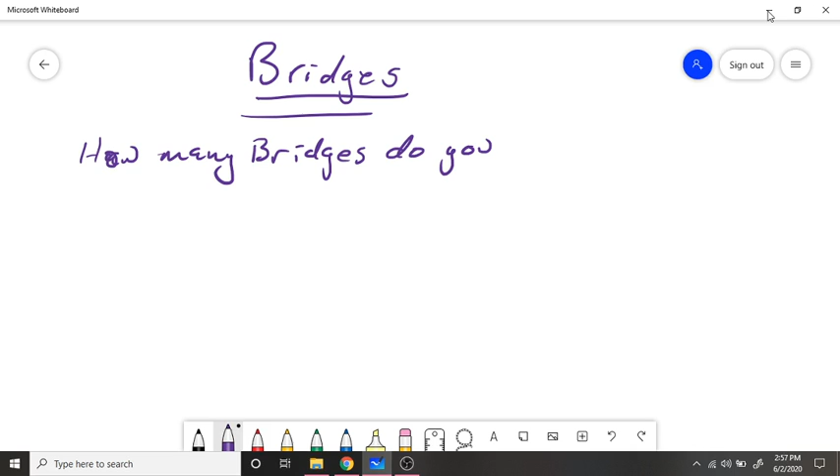How many different types of bridges do you know about? You might be able to tell me about some famous bridges, like the Golden Gate Bridge, which is a suspension bridge. Or you might tell me about how the main bridge downtown has spans, or that when you were canoeing, you saw a bridge that was like a stone arch. Most of the time, you don't ever think about bridges. They blend right into the scenery.

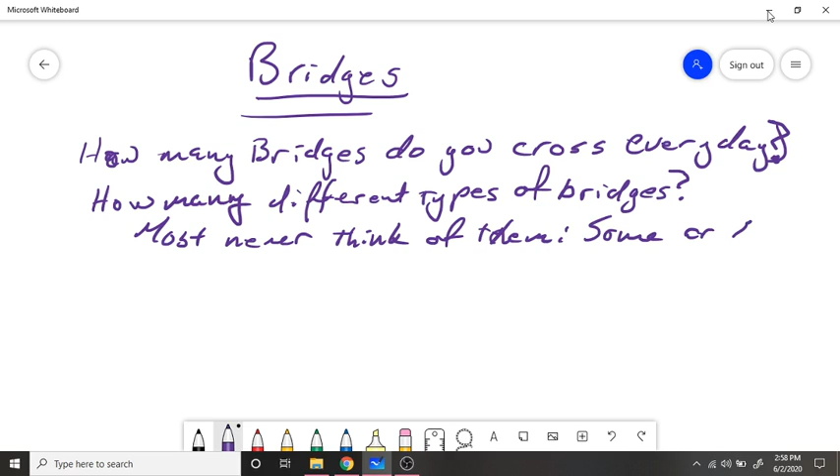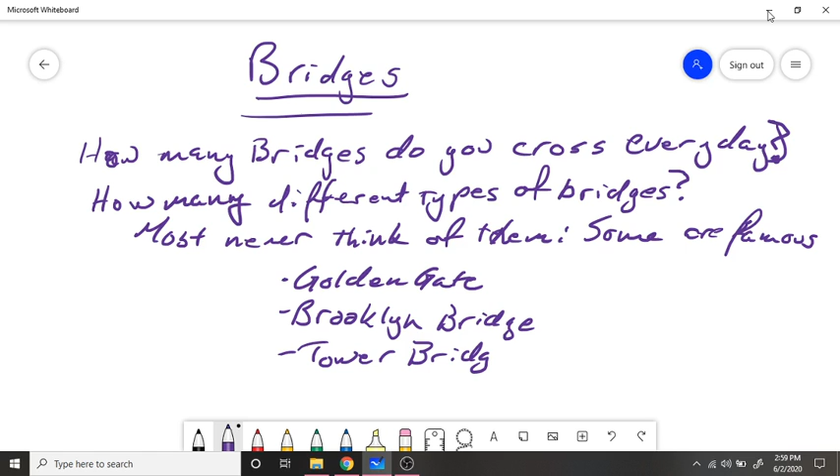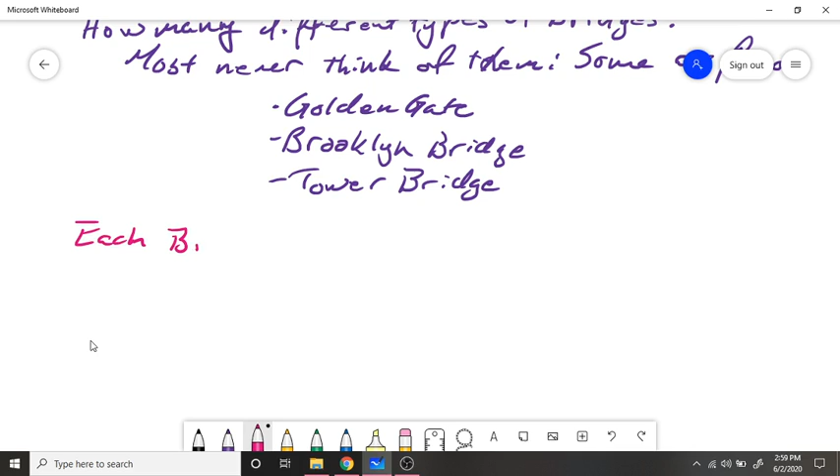But sometimes, some are very famous, like the Golden Gate Bridge in San Francisco, or the Brooklyn Bridge in New York City, or the Tower Bridge in London. But each bridge, no matter where it is located, is unique. And each bridge is going to have its own set of design challenges.

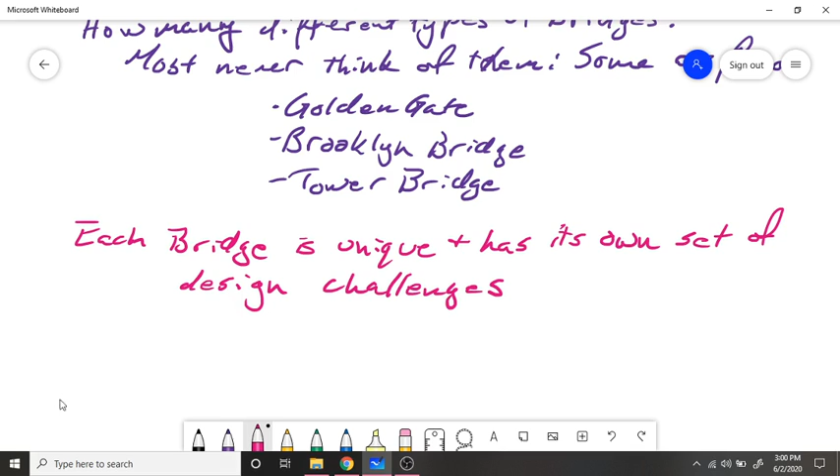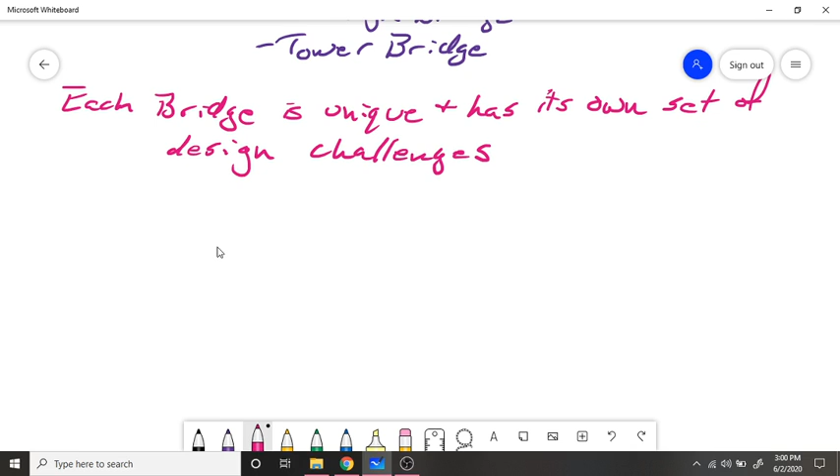For example, across the Merrimack River between Georgetown and Methuen, there are 4 bridges. There's the Rocks Village Bridge, there's the Groveland Bridge, there's the Basiliere Bridge, and then there's the County Bridge. Each one of those bridges is different because each one is built in a different location. They are spanning the river at slightly different widths, and they are in different parts of a settled community. So each bridge is unique.

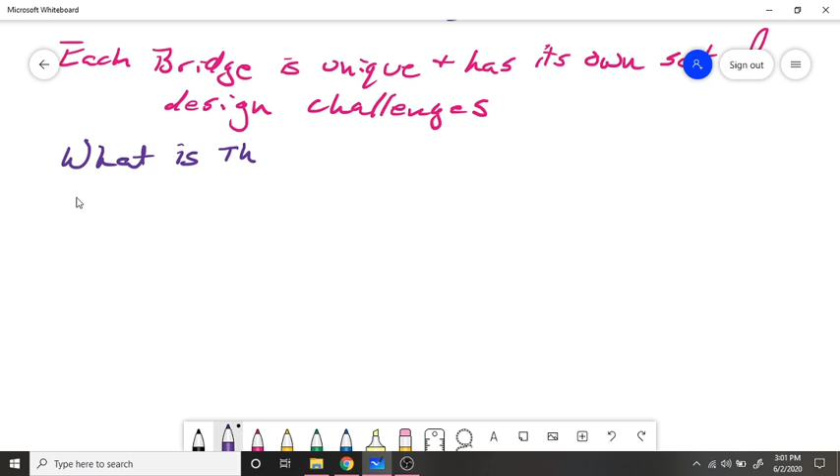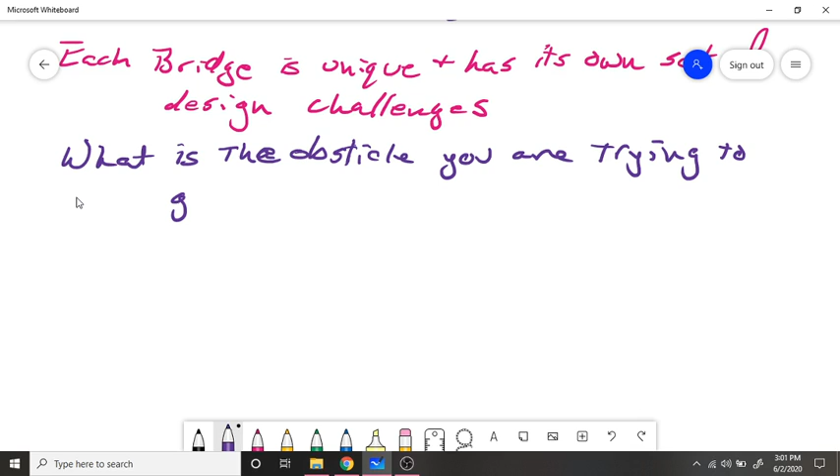When designing a bridge, you have to think about what is the obstacle that you are trying to get past. How much is this bridge going to be used? Is it just going to be foot traffic? Is it going to be cars? Is it going to be people walking and cars? So how much use is the bridge going to get? What is the kind of traffic that's going to be going over that bridge?

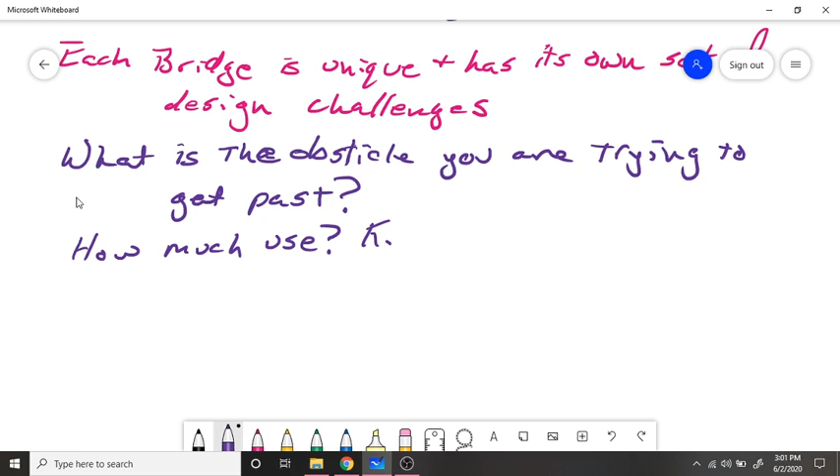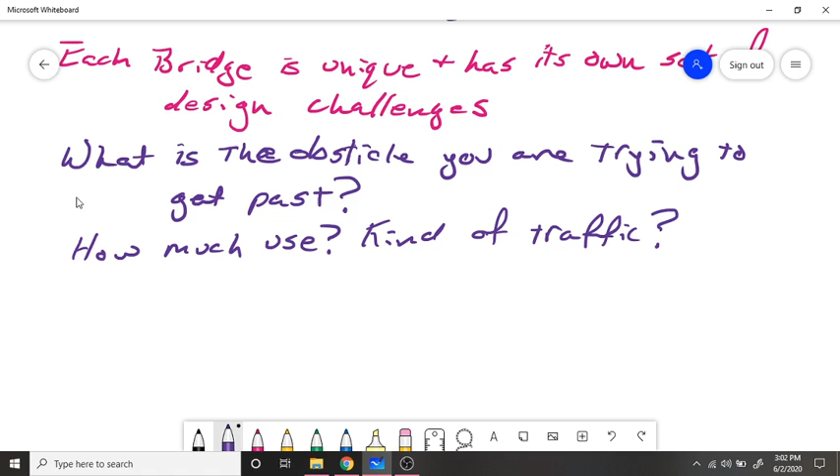Is it just going to be horses and buggies? Or is it going to be automobiles? Is it going to be 10,000 automobiles? Is it going to be automobiles and big trucks? I don't know. These are all things that engineers have to think about when they are building bridges.

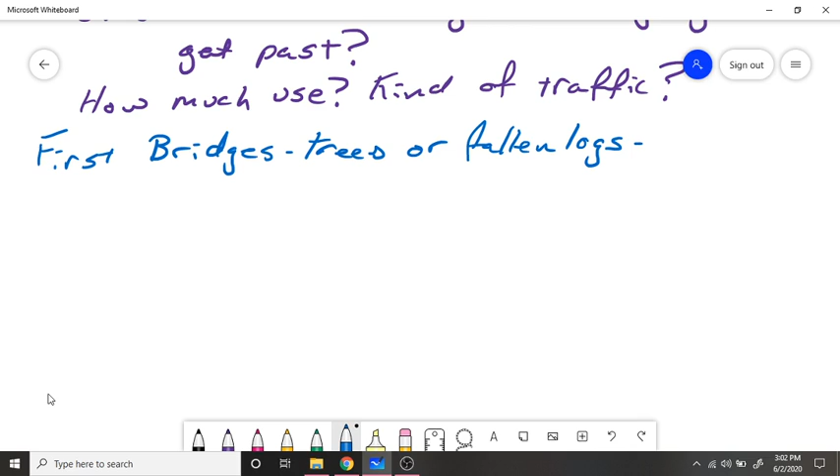What was the first bridge? The first bridges were basically logs or trees that had fallen over, going across your stream. This is not very reliable, because as you are walking along and you have to pass over a wide, deep stream, you can't always count on the fact that there's going to be a log falling across your stream exactly where you want to cross it. You can't always count that that log isn't going to be super rotted out, and you can't always count that your horse or your wagon is going to be able to cross over that log as well.

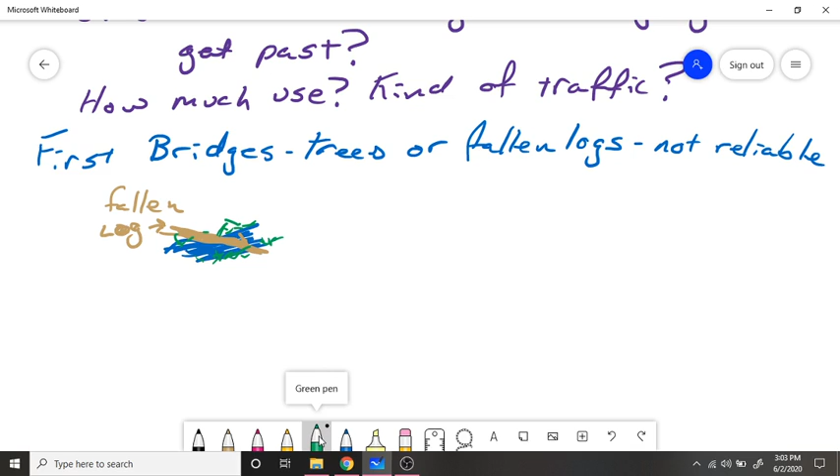Sorry, I went to change my pen and instead changed the whole screen. So, waiting around for a fallen log is not the best way to get across a river. So, people decided that they would make bridges.

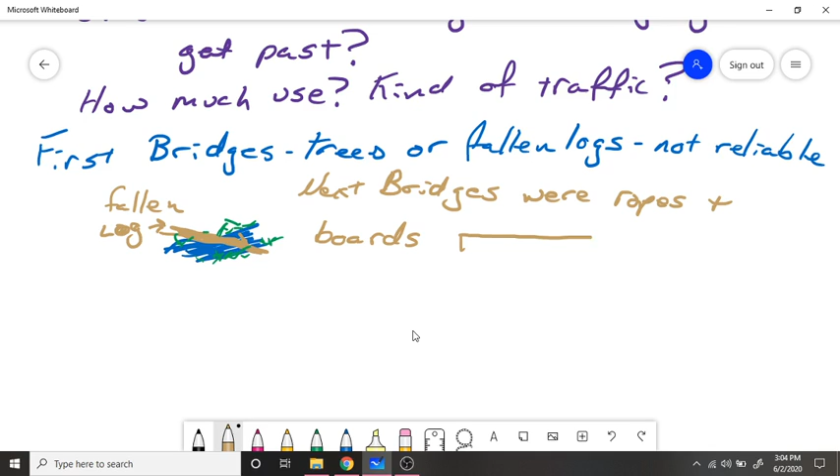The next bridges were made from ropes and boards. You might think of this if you recall Jumanji or any jungle adventure movie where your explorer has to walk across a very high ravine by crossing a rope bridge. It's going to look like this. Usually they are very rickety, and always over a very high cliff.

And here's my little river way down below. Anyway, these don't hold up well. They're okay for foot traffic. So these are good for foot traffic, maybe okay if you have a pack animal. They're not good at all if you're going to have a wagon. So they're good for foot traffic, not heavy loads.

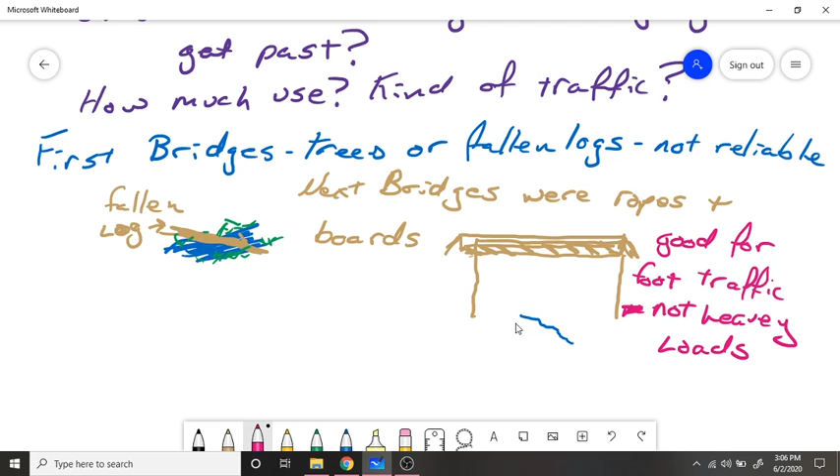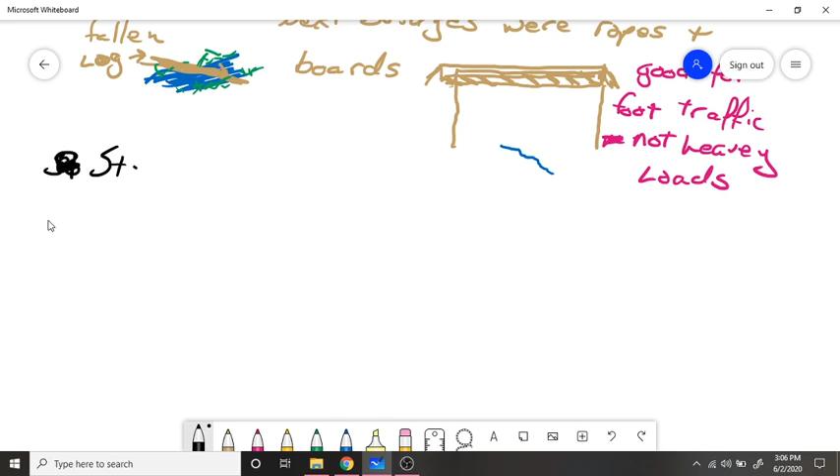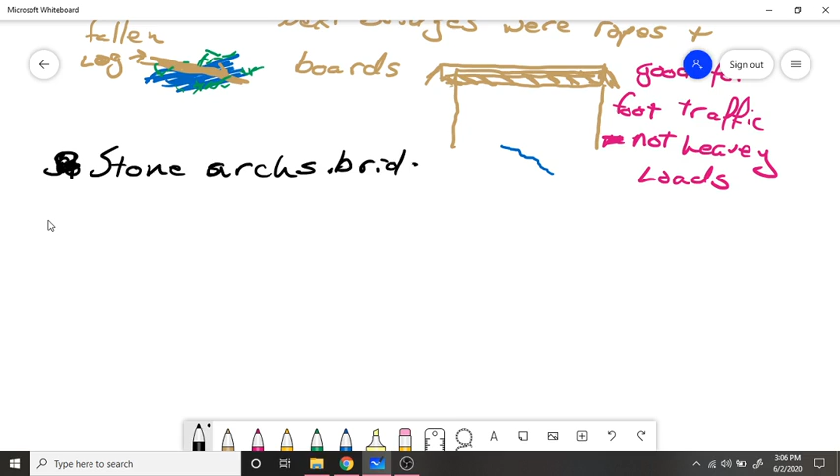But people still need a way to get across an obstacle without going miles and miles out of their way. The Romans had a really big army, and they needed a way to get that army all over Europe quickly and efficiently. And so they were really good at building roads. And they came up with a design of stone arches. So these stone arch bridges, some of which still stand today.

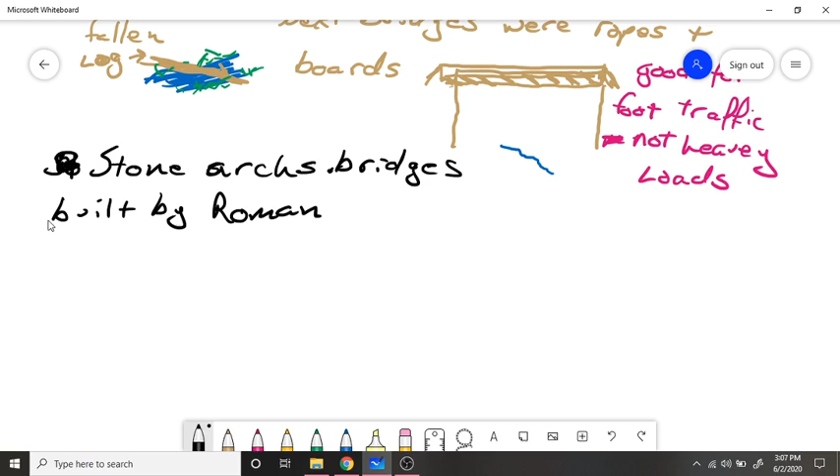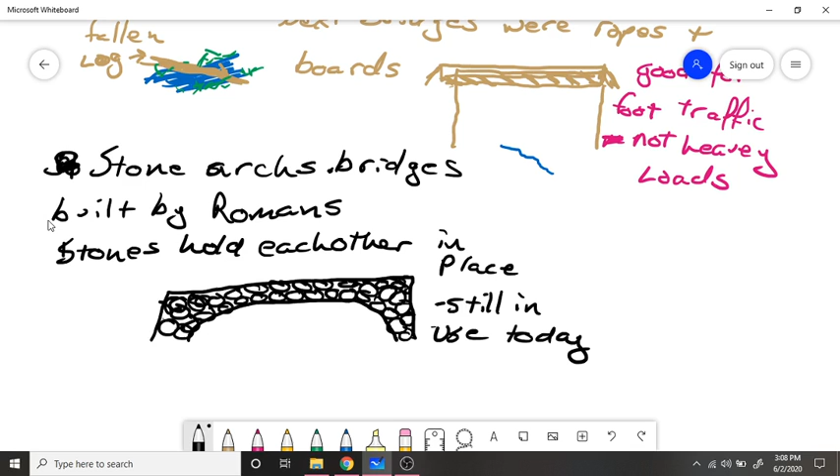Some of them are still built for the Roman army to cross streams and rivers, made from stones that have no mortar or glue holding it together. It is just held together by the weight of the stones pressing down on one another. Some of these stones hold each other in place. And some of these bridges are still in use today. So some of these bridges that support cars and trucks have been around for literally thousands of years.

You guys could probably name the three types of bridges once I tell them to you. You'd go, oh yeah. Bridges come in many shapes and sizes, but today they are variations of three main types.

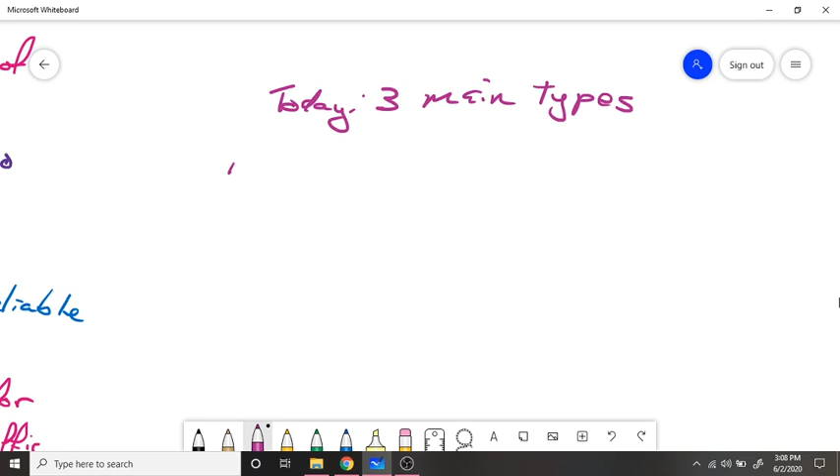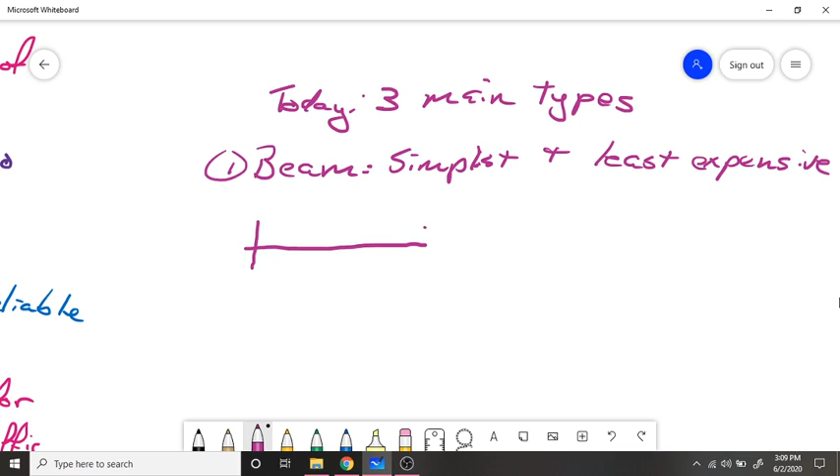The first type is the beam. This is the simplest and the least expensive to make. As its name suggests, it is quite literally a beam with two supports on each end. The supports can be called columns or piers. The beam is supported at each end by the piers.

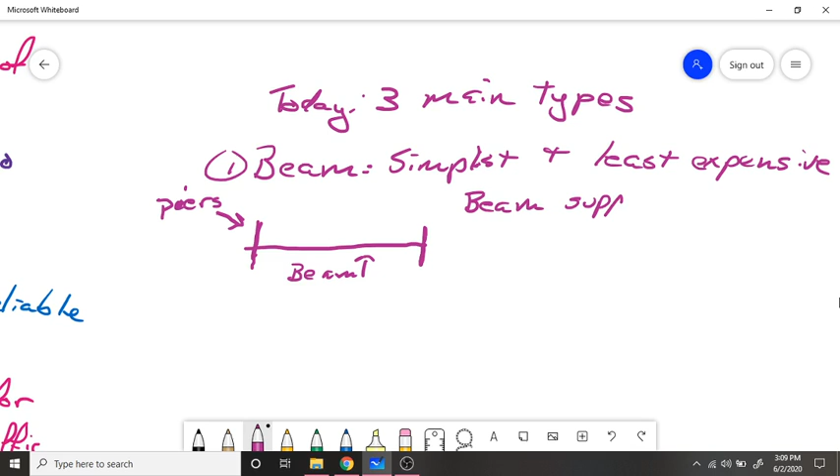P-I-E-R, by the piers. The beam cannot be so big that it sags in the center. So the beam must be able to support its own weight, and the weight of whatever is crossing it. So that is the load.

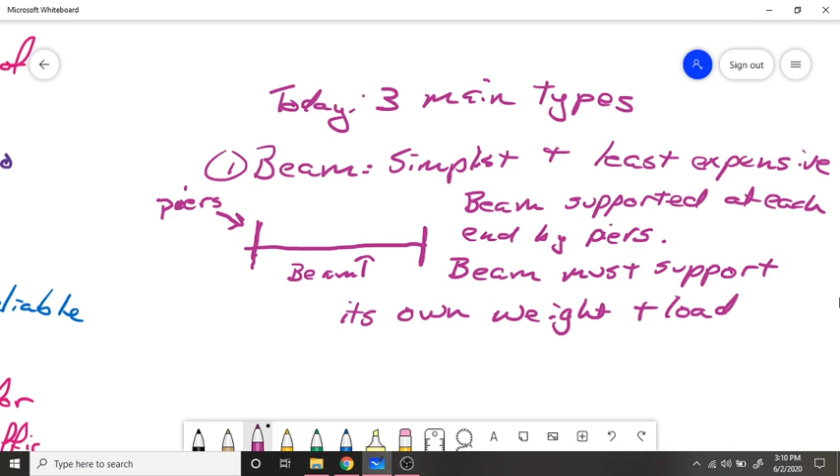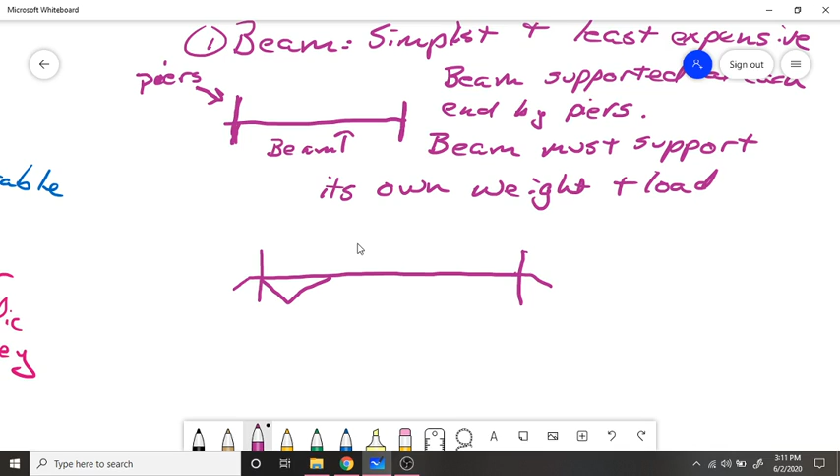So you might imagine that a way engineers get around this is they use shorter beams. And they've created a bridge that is actually made up of several beams. Underneath, they put a second layer of support. So this is a beam, this is a beam, and this is a beam. And these supports are called trusses.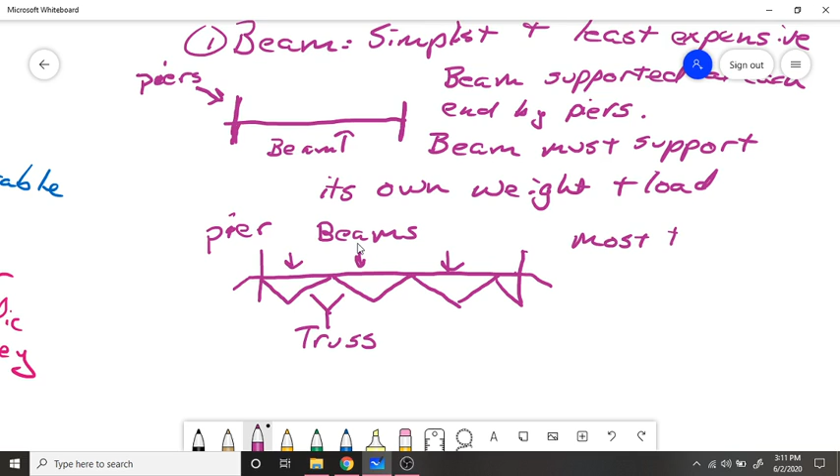Here is my pier, and here are my beams. So many of our railroad bridges are trestle bridges. Most have trusses for added support.

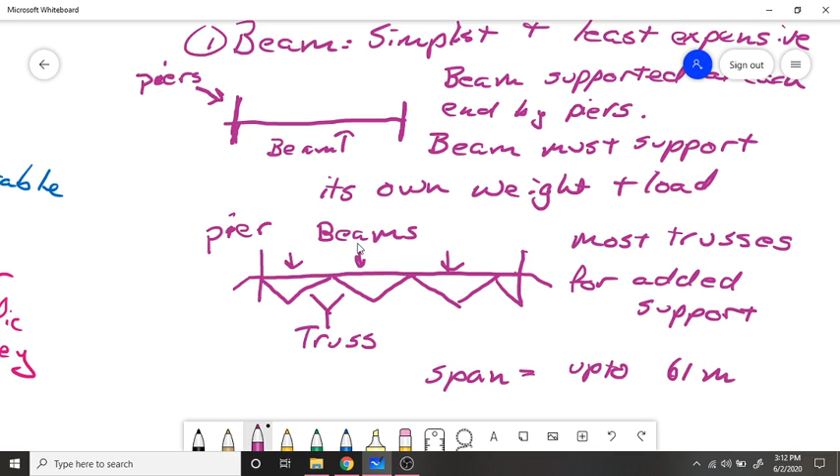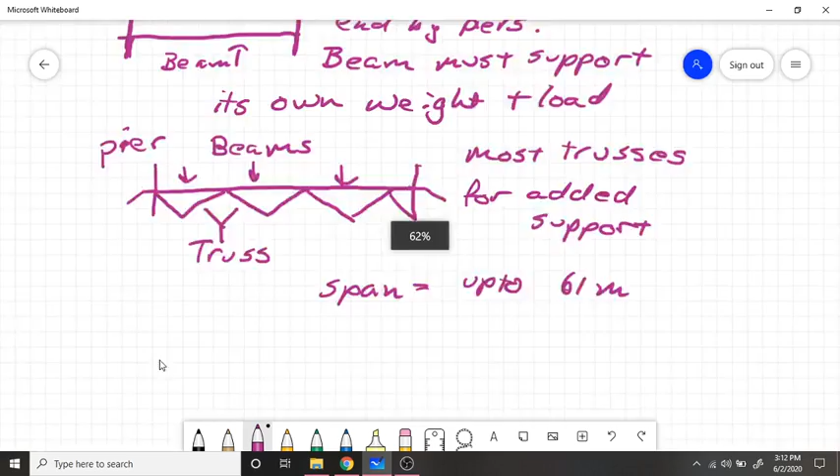But one drawback of this type of bridge, the beam bridge, is it usually only spans up to 61 meters. So that's not very far. They're simple, they're inexpensive to make, but they are not very expansive. So they have to be short bridges.

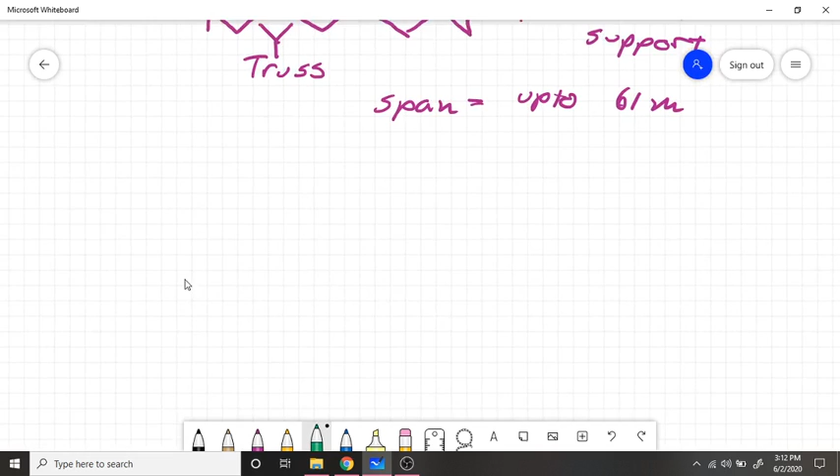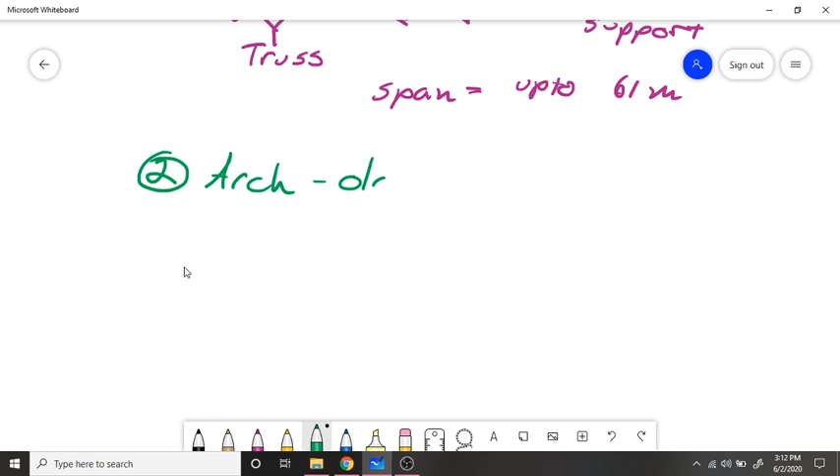The second type of bridge is our Roman arch bridge. This is the oldest type of bridge still in existence today. So the oldest standing bridges are arch bridges. And these are the strongest bridges. They've withstood time and earthquakes and floods. They really stand up.

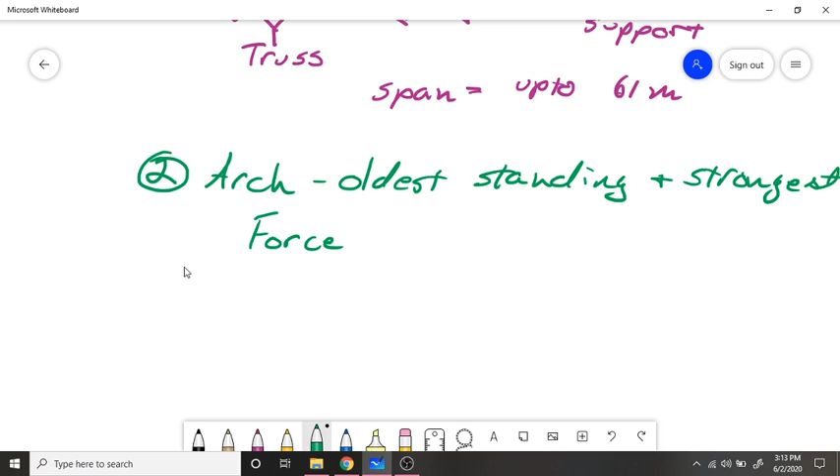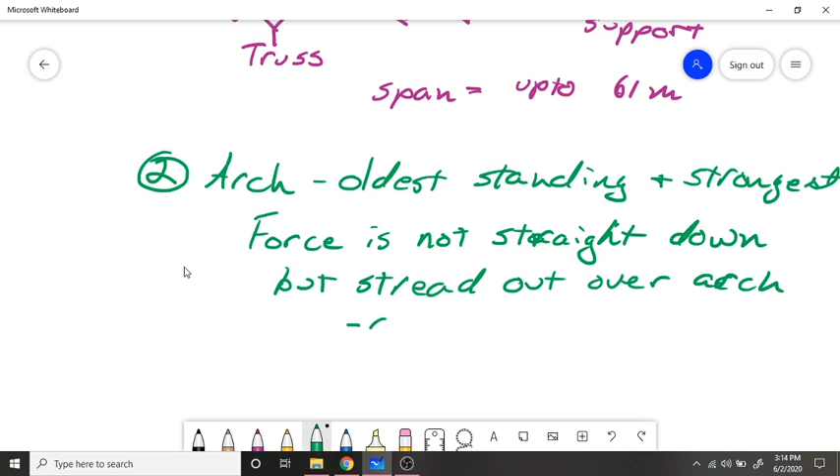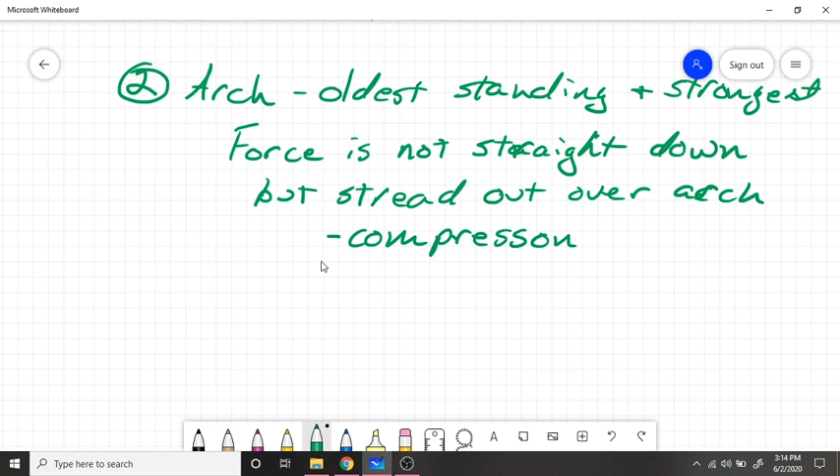And one of the reasons why they stand up so well is that force is not pushed straight down onto the bridge. But it's spread out over the archway. It is this force of compression that holds all of the stones in place and spreads any forces acting on the bridge out over the whole bridge.

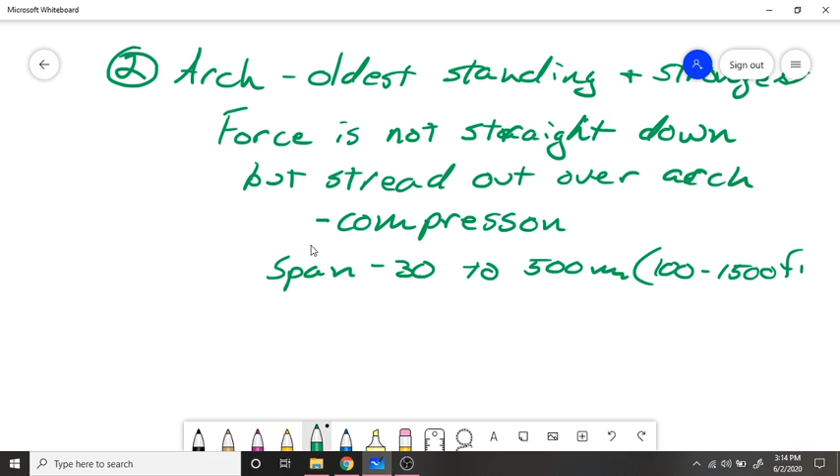Arch bridges are able to span 30 to 500 meters, which is about 100 to 1,500 feet. So an arch bridge can cross a really wide river, or maybe have a couple of arches to span that really wide river.

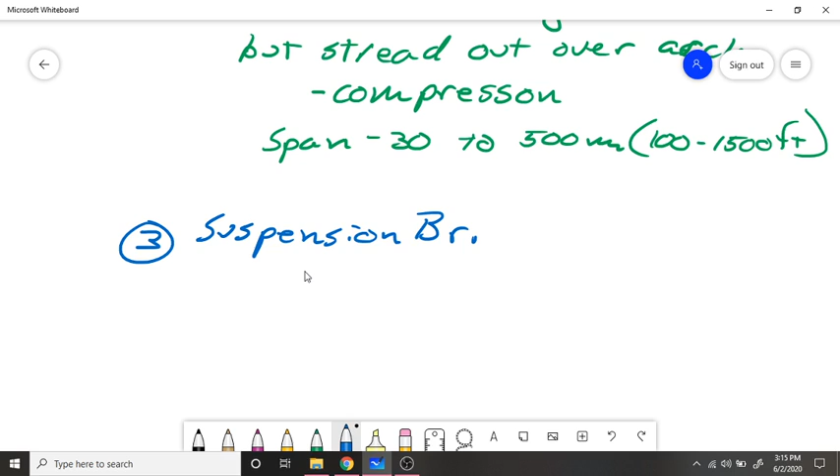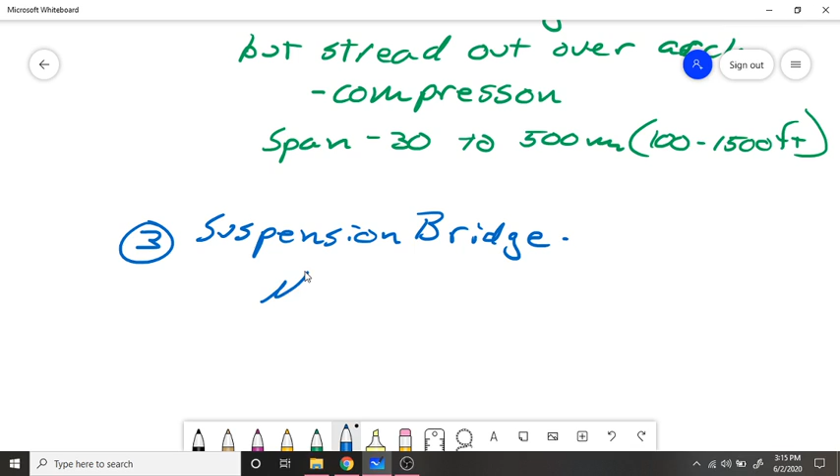My third type of bridge that you see today is called the suspension bridge. This is what the Golden Gate Bridge and the Brooklyn Bridge are. They are both suspension bridges. We have two types: we have modern, and we have cable stayed.

A modern suspension bridge is shaped like an M. It has two main towers with a main cable running from tower to tower, with other little cables coming off of that main cable.

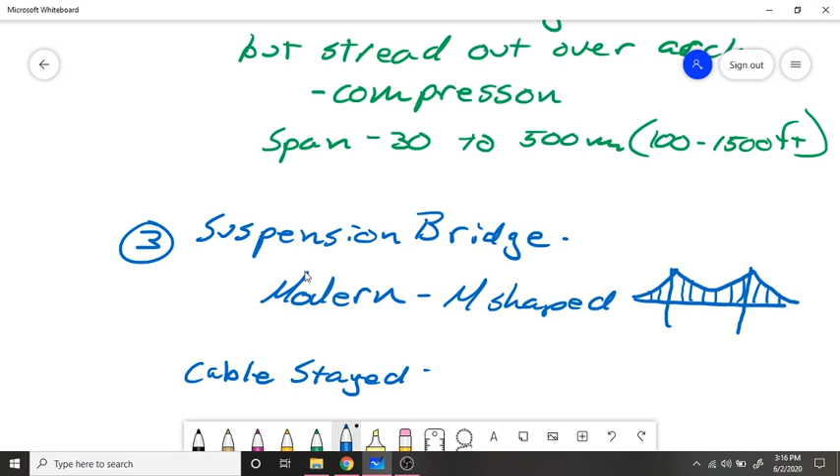A cable stayed suspension bridge is A-shaped. It has a beam, just like the modern one, and usually two columns. Only all of the cables are coming off of those columns, so they look like the letter A.

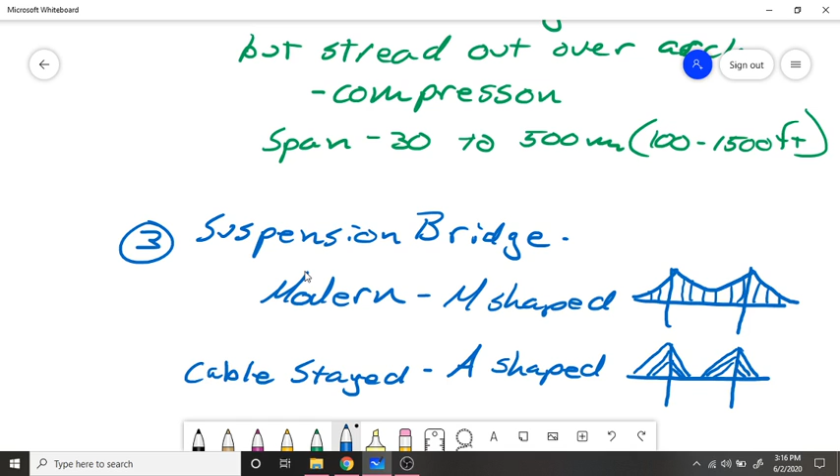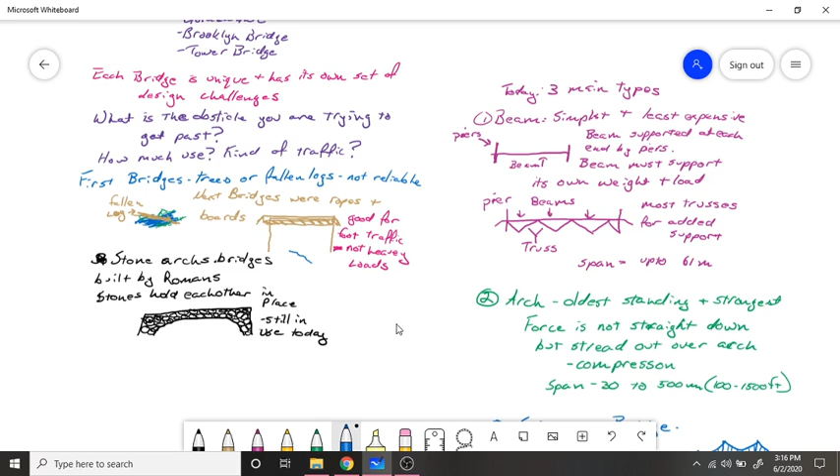Those are the three main types of bridges. Tomorrow, I'm going to talk to you guys about what kind of forces act on the bridges and things that you need to think about if you were making a bridge.